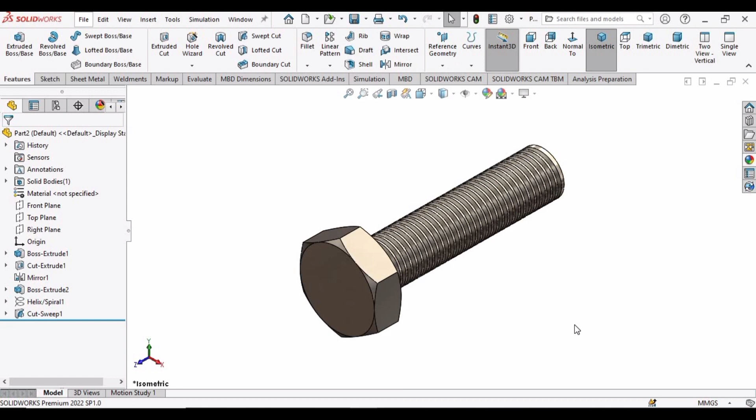So at first select file, click on new, select part and then click OK. And here select front plane and click on sketch. Make a polygon here, make sure it has 6 sides. Now select smart dimensions and select 2 opposite corners like this and make this dimension as 48.

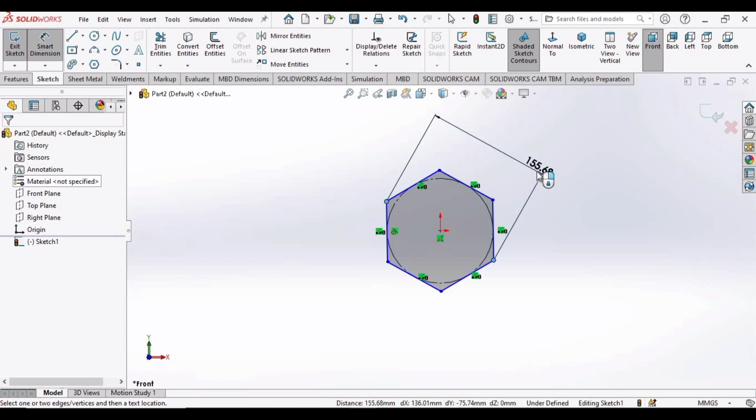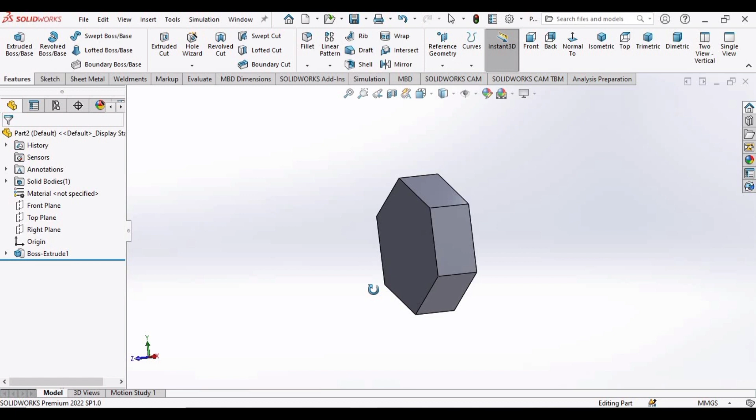Okay, and now go to features, select extruded boss base, select here mid plane and set this dimension to 15. Okay, and then click OK. Now select this face, click on sketch and make a circle here at this origin from this up to this wall.

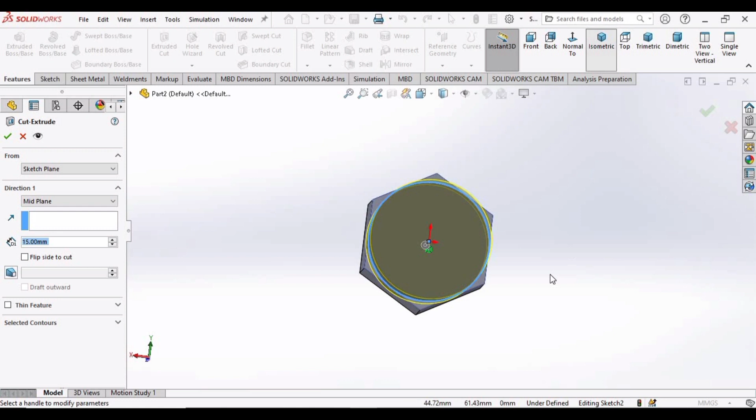And now go to features, select extruded cut. This time we will be making a profile here, so select this flip option. Let me show you again, uncheck this and now you can clearly observe it.

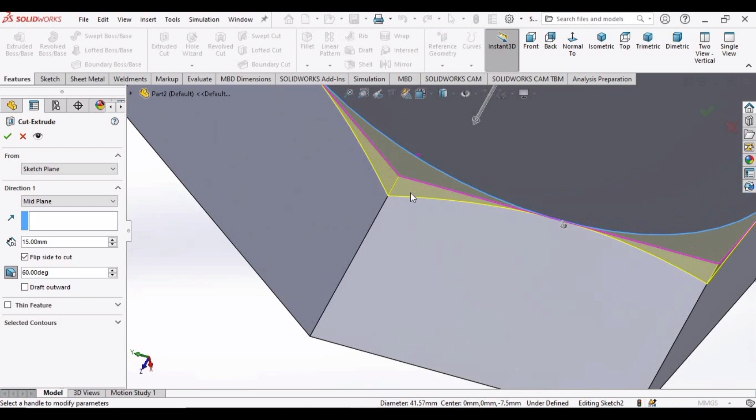So select this option and make it as 60 degree and here you can see the profile. This is at 60 degree. Now click OK and here you can see the profile. Let me change the background and assign it some color so that you can better visualize it.

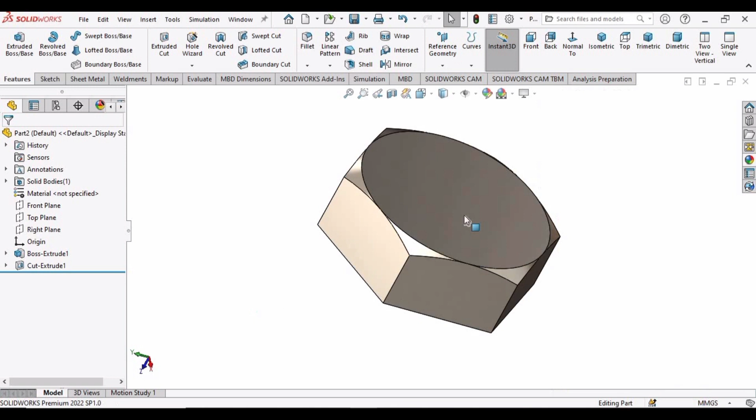Go to appearance, select metal and in nickel I am going to assign this material. It looks better and now you can see the profile. We have to make the same profile at the back side. For this we will be using the mirror command.

In the plane just expand this bar and select the front plane. This is the front plane and in features to mirror select this last extruded cut and here we have the mirrored feature.

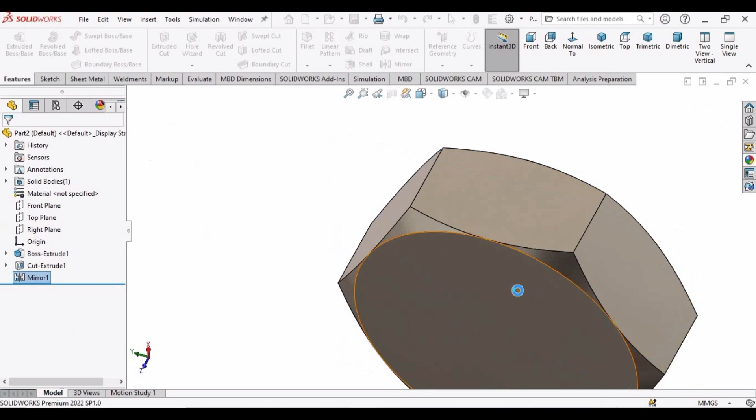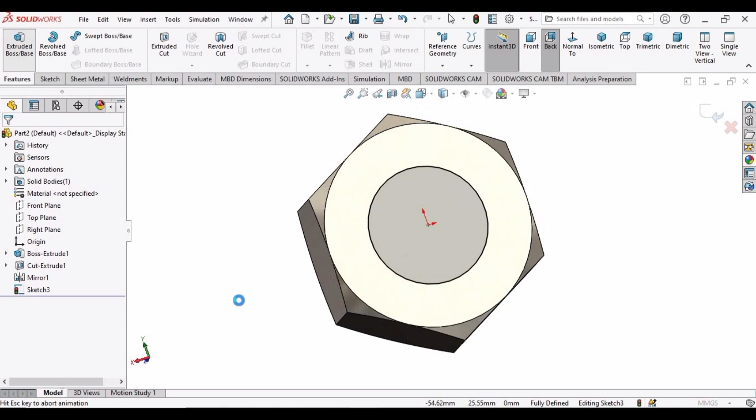Now select this face and click on sketch. We will be making a circle here of diameter 24 millimeter. Specify 24 mm dia and now go to features, extruded boss base and extrude it up to 100 millimeter. Change the direction from mid plane to blind, and then click OK.

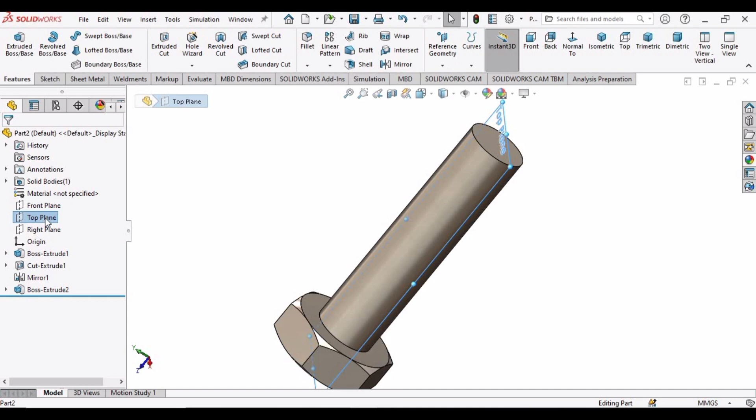And now we are only left with the thread. So select this plane, this is the top plane and click on sketch and then make lines from this corner. Make a triangular shape like this. Now select smart dimensions and make one side as 2 millimeter.

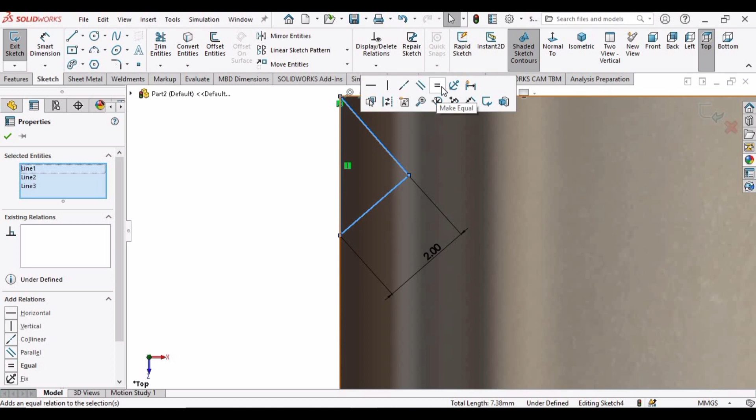Now press the control button and select all of these 3 lines. Make sure that you have pressed the control button and make relation as equal. You can make here equal as well. Okay, and now click OK. Exit the sketch

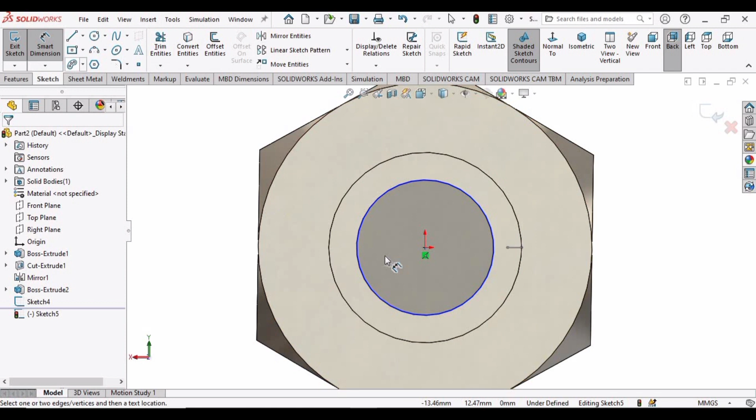and now in this curves option select this helix. Okay, helix and spiral. It will automatically reorient this part. So make a circle here at this origin and make the diameter as 24 millimeter again. As soon as you exit the sketch, this helix will automatically appear.

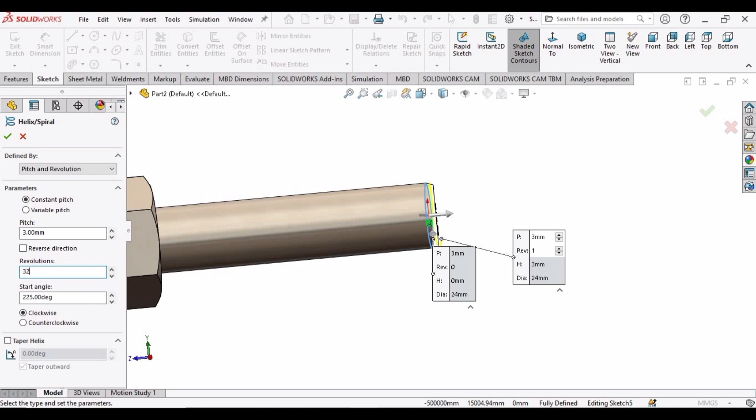Now let's specify the pitch as 3 and you can see the difference here. Specify the revolutions as 32 and here you can see, just reverse the direction and in starting angle it is fine, 225. Clockwise direction is more preferable and then check this option.

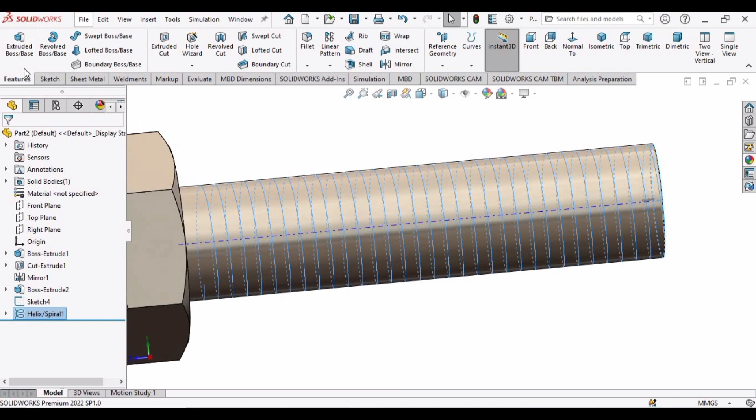Now go to features and select swept cut option. Here this helix is already selected and in this window expand this bar and simply select this sketch. Okay, and now click OK.

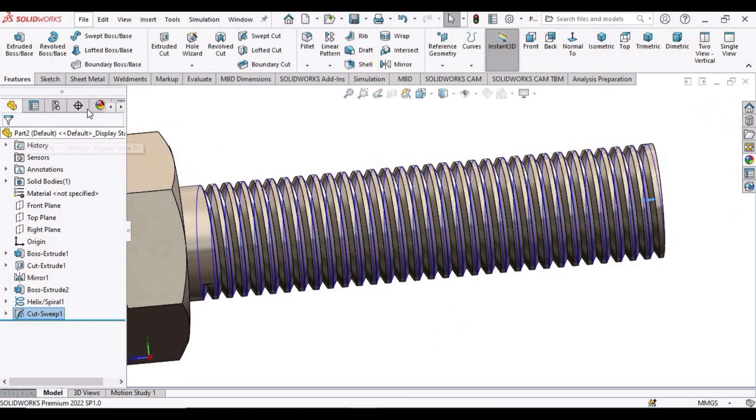Now just hide this blue colored helix, zoom in, select this blue colored line, and click on hide. So here we have the bolt with the thread.